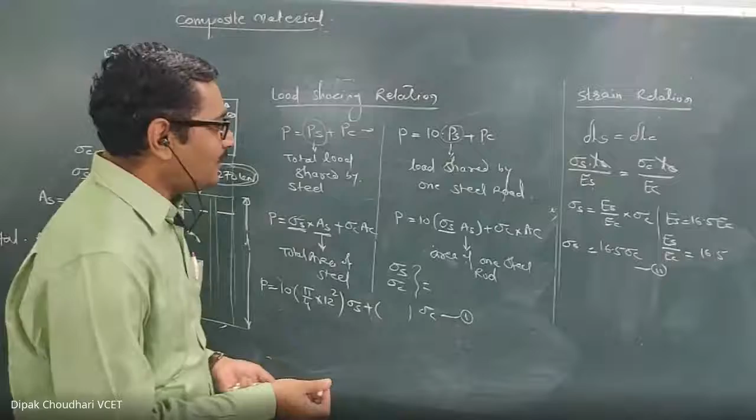Since the materials are rigidly connected, they are not free to elongate separately. And since they are not free to elongate separately, the total load applied is shared between the two different materials. So first you have to write down the load sharing relation.

Load sharing relation: P equal to P1 plus P2. P1 is the load shared by material 1, P2 is the load shared by material 2. Because of P1, the stress induced in material 1 is sigma 1. So the same equation can be written as sigma1*A1 plus sigma2*A2, where sigma1 and sigma2 are the stresses induced in materials 1 and 2 because of P1 and P2.

From this we can get one relation, either the first equation or the second equation. Then next you have to write down the strain relation, which means the relation of their deformation. For every such problem you have to write these two equations: the load sharing relation and the strain relation.

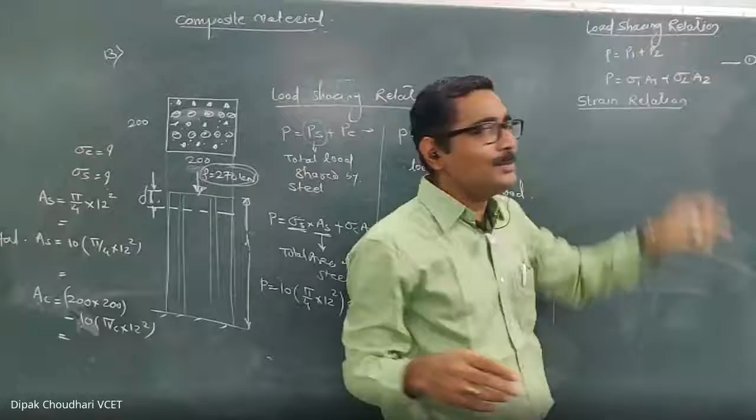But the equation will be different. The load sharing won't always be P equal to P1 plus P2. Then there's this situation where two different materials are rigidly connected.

They are connected in parallel, and when the load is applied, here's a very simple case. The total load applied is shared between them, but depending on the different situation, we have to change the load sharing relation as well as the strain relation.

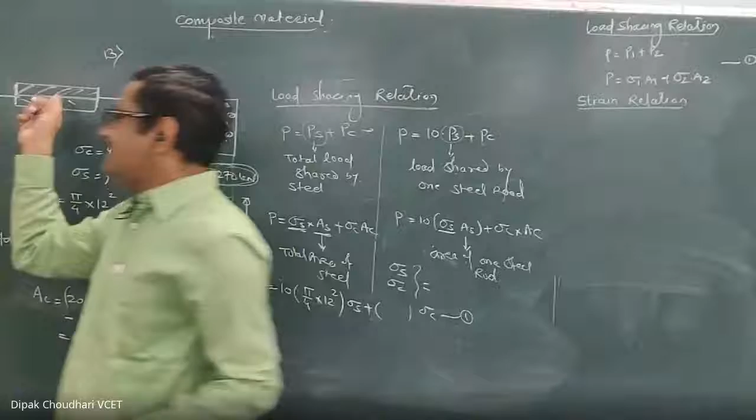In this case, since these two materials are rigidly connected, because of the external applied force, the deformation of both materials will remain the same. So we can write the strain relation as delta L1 equal to delta L2.

Delta L1 and delta L2 can be written in terms of P1 and P2, or in terms of sigma1 and sigma2. For example: P1*L1/(A1*E1) equal to P2*L2/(A2*E2). This is the equation in terms of P1 and P2. Or I can write sigma1*L1/E1 equal to sigma2*L2/E2.

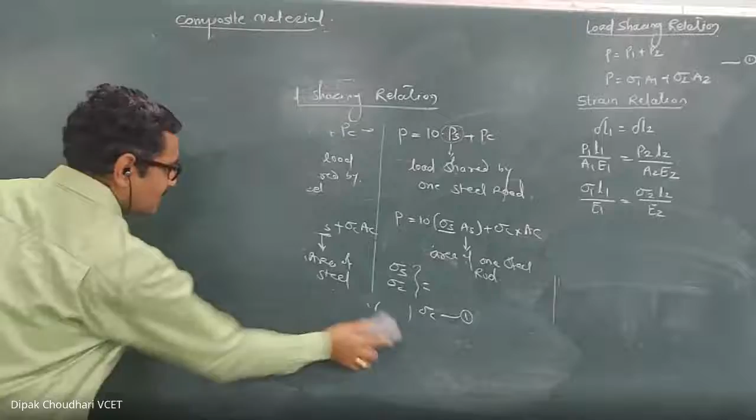In this way we have to write down the strain relation and the load sharing relation. Now, in the last two problems we solved, we calculated the stresses induced in two different materials because of some external forces. At the end of the last lecture, I told you the difference between induced stress, allowable stress, yield stress, ultimate stress, and all these things.

Now today we are going to solve the next problem, sum number 14 from your PDF. I am drawing the figure.

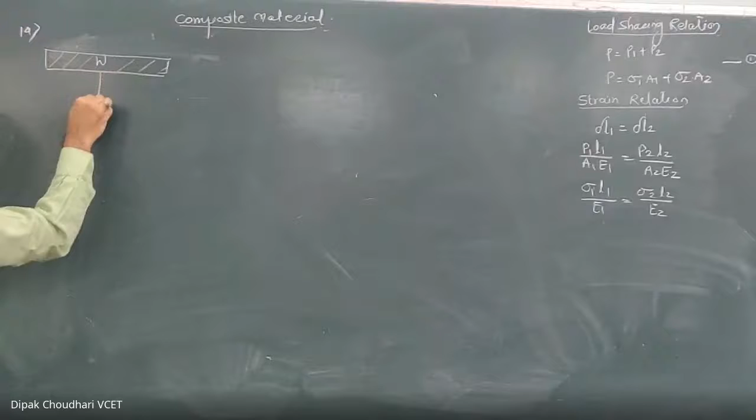This is one load W, which is supported by three rods. This is one rod, this is another rod, and this is the third rod, and it is symmetrical. Due to symmetry, the load shared by these two rods will be the same.

Now at the bottom, the support is like this. In fact, the initial length of all three rods are not the same. This is the brass rod, and this middle one is the steel rod. Two different materials are there, and they are connected.

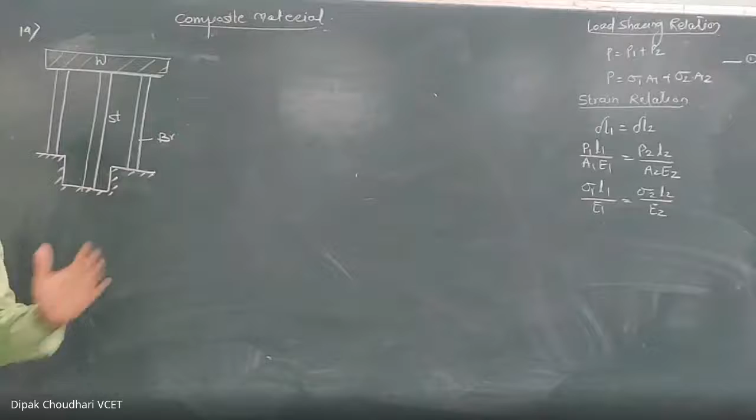Between these, there is no rigid condition, but they are symmetrically spaced. Because of this load W, this is also steel... these both are same, sorry, brass. These both are same length, same cross-sectional area, meaning the load shared by these two rods will also be the same. So because of this W, let's see what we have to calculate.

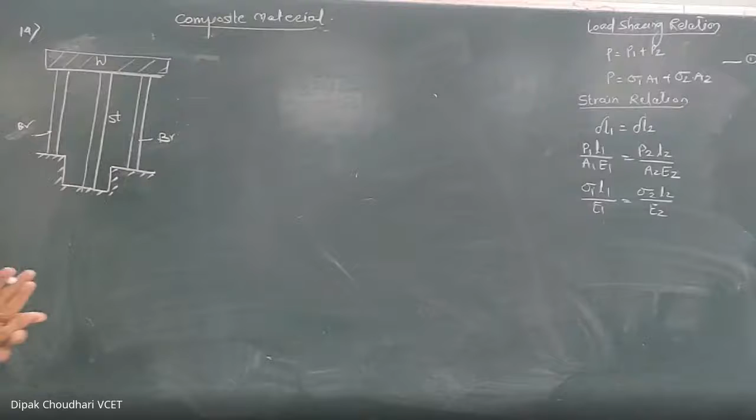But here, the brass and the steel, we have to assume them as rigidly connected. They are not free to act individually. In this case, it won't be that because of this load, only the steel will compress and the brass will not compress. So we have to assume them as rigidly connected.

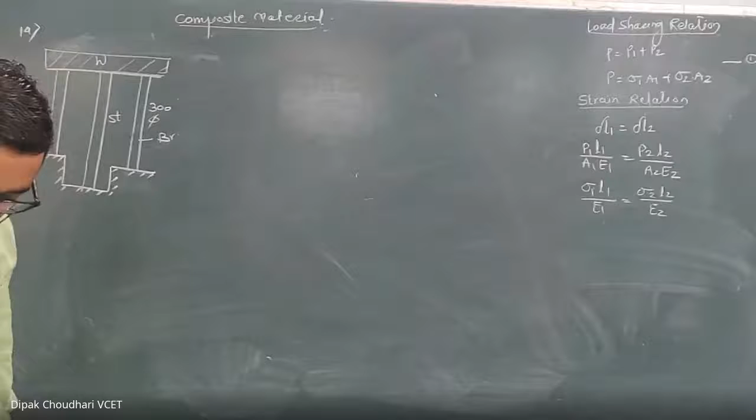Now it is given that a rigid block of weight W is supported by three symmetrically spaced rods. The brass rods are 14 millimeter diameter and 300 millimeter length, both having the same length and same cross-sectional area. And the allowable stress is 90 megapascal. This is something new in this question - these allowable stresses are given.

Allowable stresses: the allowable stress in the brass should not exceed 90 megapascal, which means 90 Newton per millimeter square.

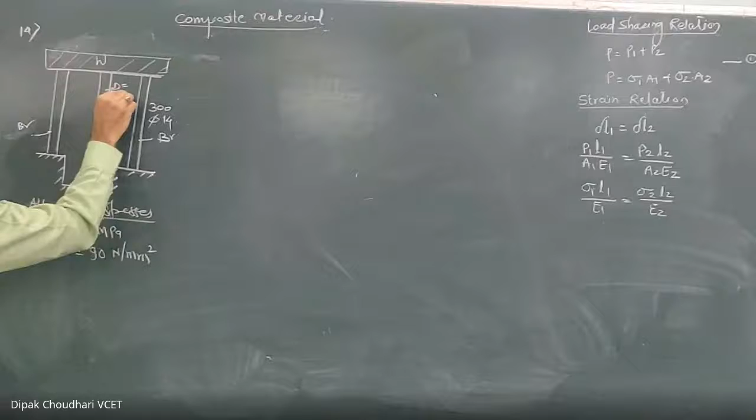The steel rod is hollow with 20 millimeter and 16 millimeter being the external and internal diameter. For the steel rod, the external diameter capital D and internal diameter small d are given: external diameter is 20, internal diameter is 16. The length of the steel is 500 millimeter.

The allowable stress in the steel is 120 Newton per millimeter square, that is 120 megapascal. Allowable stresses are given.

Determine the safe maximum value of W which can be supported. You have to calculate corresponding to the safe allowable stresses - how much maximum safe load which we can apply on this system. Here, you have to calculate W safe, the safe load which we can apply, corresponding to this condition and these allowable stresses.

Take ES equal to 200 GPa and EB equal to 80 GPa. Modulus of elasticity of the steel is 200 gigapascal, and modulus of elasticity of the brass is 80 gigapascal.

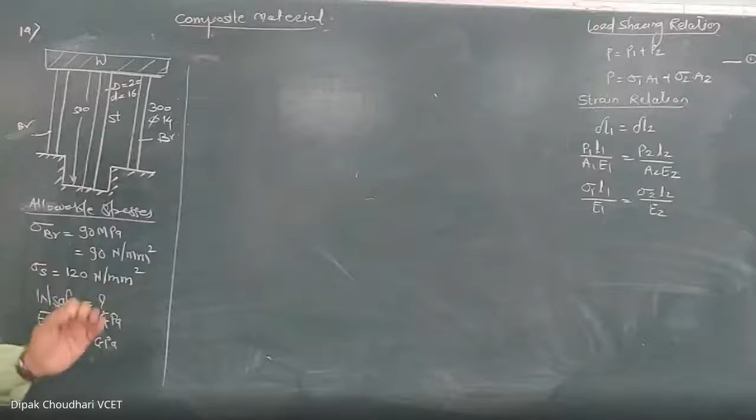Now, first thing, the difference between the previous question and this question is that in the previous question, the load applied on this composite material was given. Corresponding to this load applied, we have calculated the stresses in material 1 and stress in material 2.

Just one minute. We have to calculate the stress induced in material - sorry, we have calculated the induced stresses in material 1 and 2.

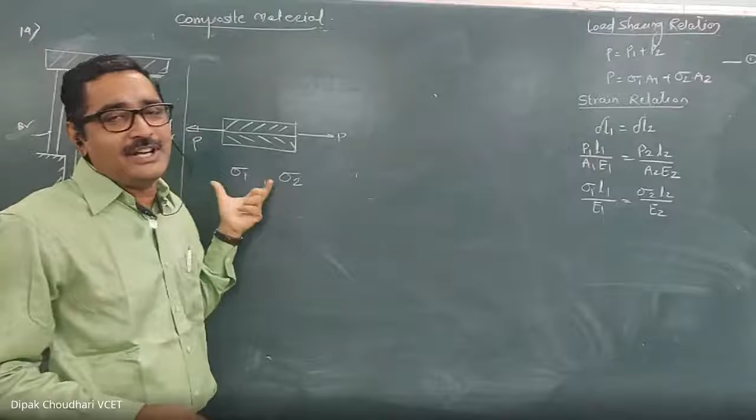Now, in this question, corresponding to these allowable stresses, we have to calculate the safe load W. These are the allowable stresses in steel and brass - the permissible stresses. During its service period, at any time, the stresses induced in the material should not go beyond this.

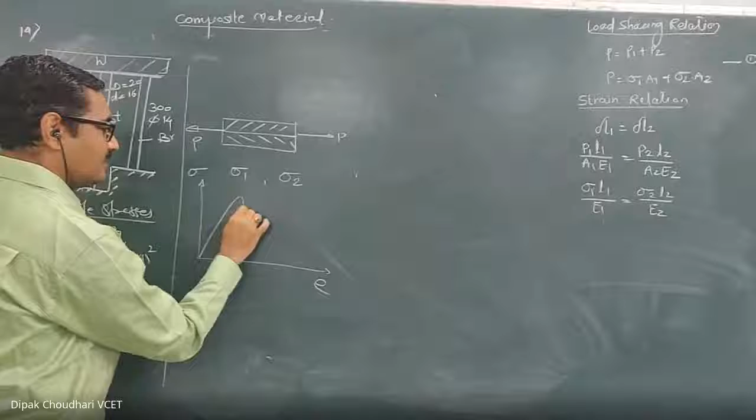These stresses we calculated earlier were different - those were the induced stresses, whereas these are the allowable stresses. In the stress-strain diagram, normally these allowable stresses are within the elastic limit.

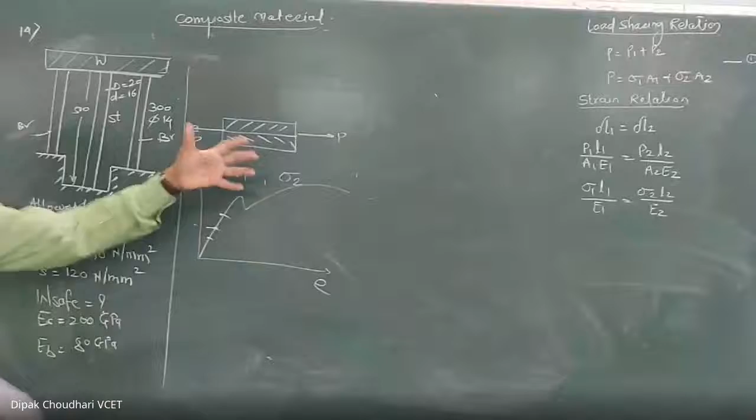Induced stresses are always less than allowable stresses. If the induced stresses go beyond allowable stresses, we can say these are not safe. Induced stresses may vary depending on the external applied load - if the external applied load is less, the induced stresses will be less. But these are the allowable stresses.

This is the limitation: the stresses induced in this material at any time should not go beyond that particular value. These are known as the allowable stress. Now corresponding to this allowable stress, we have to calculate the safe value of the load W.

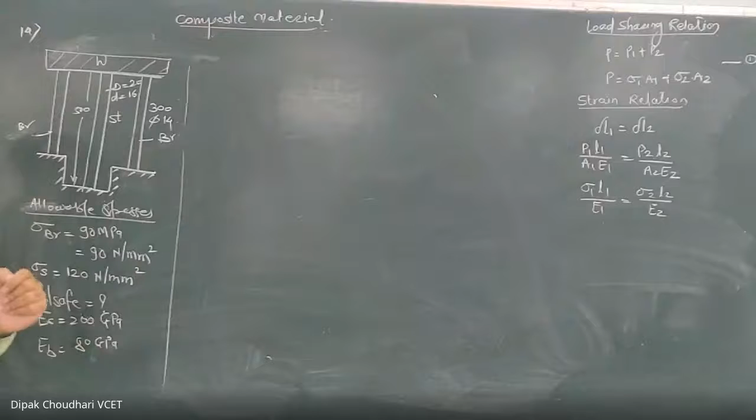Remember, whenever such a composite material system exists and the allowable stresses in both materials are given, it is not necessary that both materials will reach their permissible value of stresses simultaneously. I am explaining this concept once again later, but now we'll proceed with this.

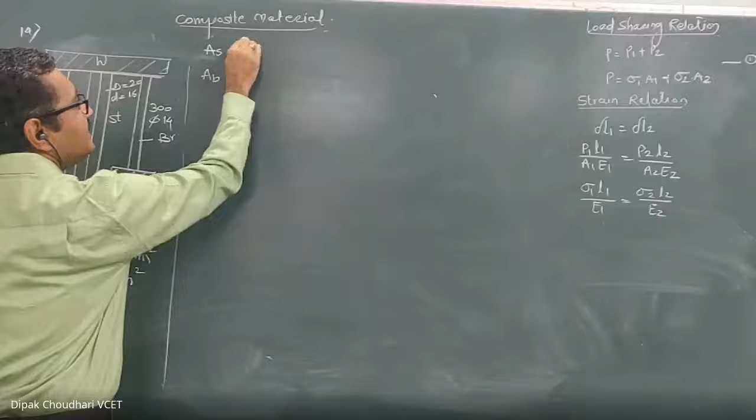First I will calculate the cross-sectional area of steel and cross-sectional area of brass. Cross-sectional area of steel is pi by 4 into capital D square minus small d square. Calculate and tell me the answer.

Cross-sectional area of the brass - I am considering only one brass rod. If you consider the total cross-sectional area of the brass, then you have to consider 2 times. It is pi by 4 into 14 square. Let's make it 2 times, I'll explain you the next time.

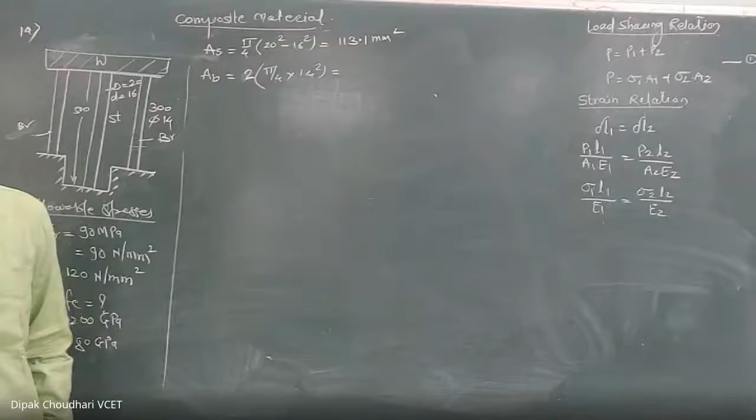Tell me, how much is the area? Is it 113.1 millimeter square? Okay, no problem. And the second one, if you consider 2, it is 307.89.

Okay, this is the cross-sectional area of the brass, this is the cross-sectional area of both the brass rods. So they have calculated the cross-sectional area.

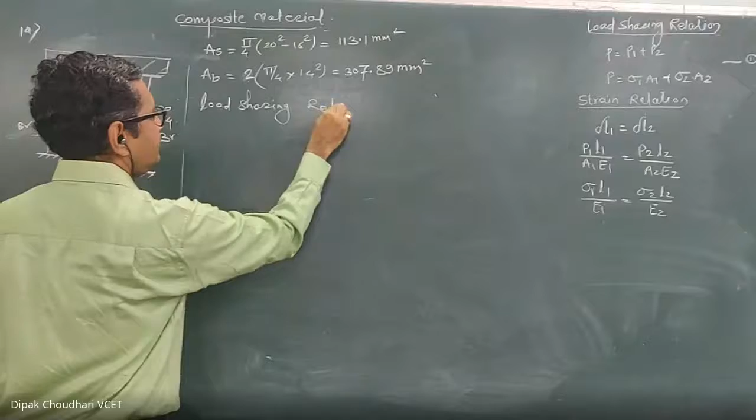Now let's write down the load sharing relation. This load W which we are applying on these 2 rods is shared by the 2 materials. Considering this brass rod, though there are 2 brass rods, we can write the relation: total load applied equals load shared by the brass plus load shared by the steel.

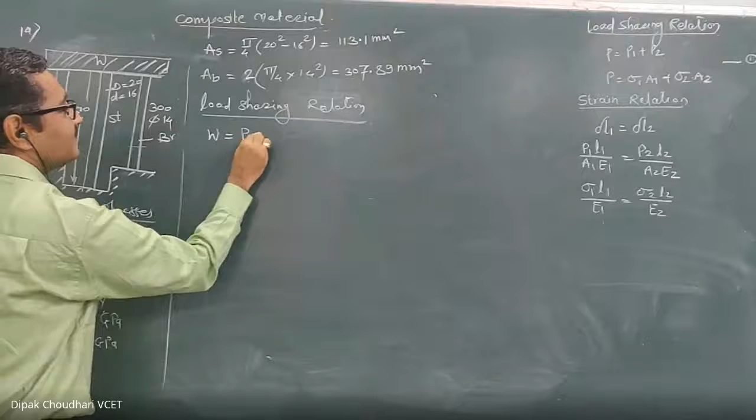If you write the load shared by the brass in terms of stress, PB equal to sigma B into AB, then this will be the area of the total brass rod, both the brass rods. If you write it as 2 PB instead, then it's the load shared by only one brass rod, and you'd consider the area of only one brass rod. The ultimate equation will be the same. Since I have considered the area of both brass rods, I will write the equation W equal to PB plus PS.

So W equal to sigma B into AB plus sigma S into AS. Now I know AB and AS, let's substitute that. So W equal to AB, which is 307.89, into sigma B, plus AS, which is 113.1, into sigma S. Call this equation number 1.

Look at the board now, this is a very important step. I substituted the value of the area and wrote this equation. Now in this equation there are 3 elements: W, sigma B, and sigma S. In the last question we solved, W was given and we calculated the stresses. Remember, in this equation these are the induced stresses, induced because of this ultimate load W.

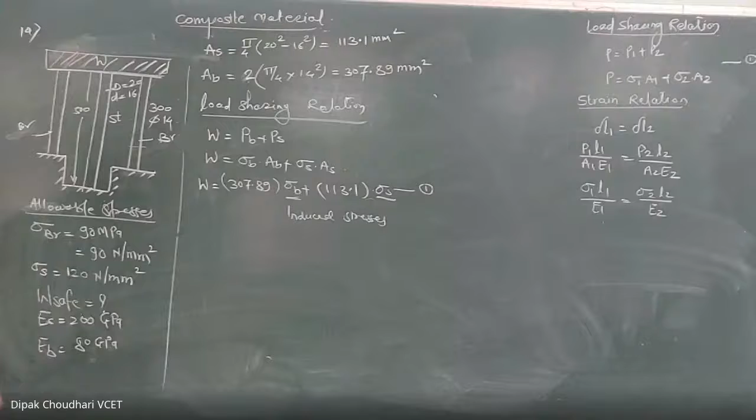Now here students make the mistake of directly substituting the given values of stresses in brass and steel into this equation to calculate the load W. But when you calculate this load W, it may not be safe, because those given values are allowable stresses, whereas these in the equation are the induced stresses. Understood? So don't substitute the allowable stresses in this equation.

Understood, clear? Now what to do? Let's keep this equation as it is, and write down the strain relation.

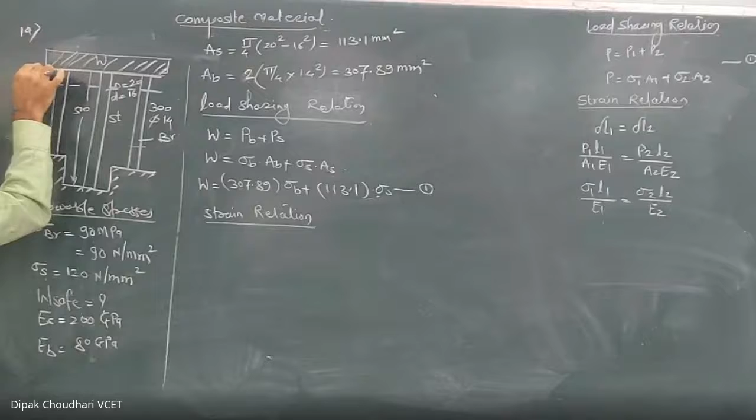Strain relation. Now, because of symmetry, when this load W is applied, whatever compression occurs because of this compressive load will remain the same due to symmetry. This compression will be the same for the brass as well as the steel. It won't be an inclined compression, because of the symmetry.

It goes linearly downward, and because of that, the deformation or compression of the brass and the compression of the steel will remain the same. So the strain relation can be written as delta LB equal to delta LS — deformation of the brass equal to deformation of the steel.

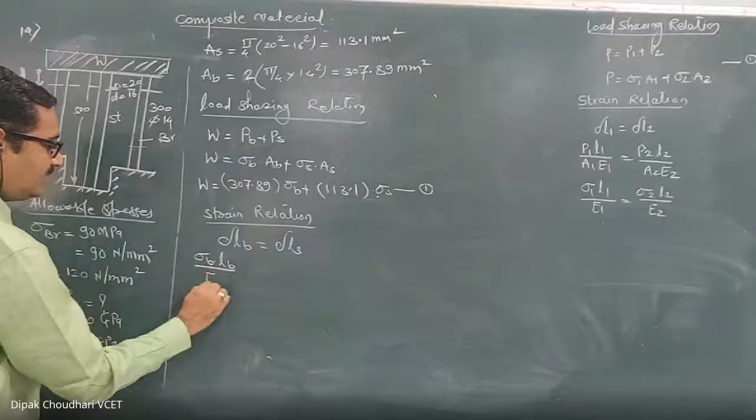This equation in terms of stress can be written as sigma B into LB upon EB equal to sigma S, the stress induced in the steel, into LS upon ES. Again, sigma B and sigma S are the induced stresses because of any load applied. If you know the load applied, you can easily calculate the induced stresses by solving these two equations. But here we have to calculate the safe load W corresponding to the allowable stress.

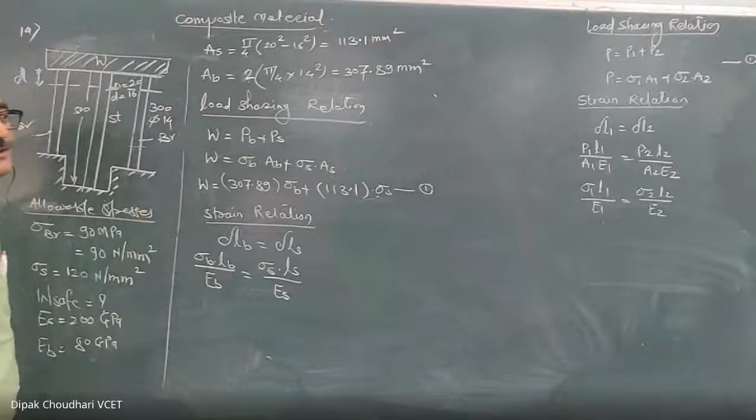Coming back to this — last time what we solved, the lengths were equal, but here the lengths are not equal, so they won't get cancelled. So let's substitute the value of LB and LS.

So I can write sigma B into LB, the length of the brass rod, which is 300, equal to EB upon ES into LS, the length of the steel rod, which is 500, into sigma S.

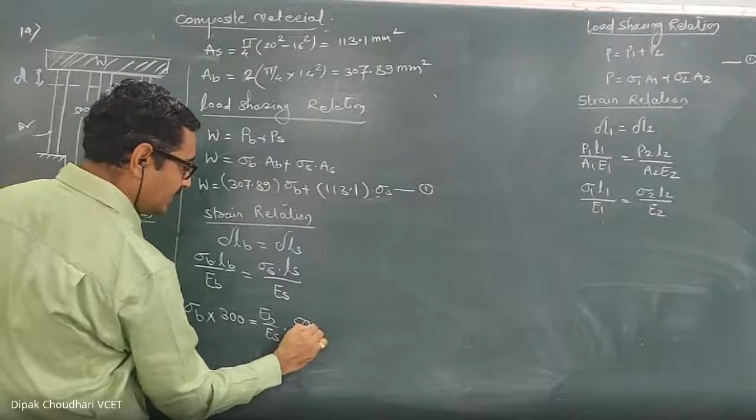Now this is the modular ratio, or 1 upon modular ratio — EB upon ES, where EB is given and ES is also given. This 300 and 500 are in millimeters, so you can convert into Newton per millimeter square. If the stress values are in Newton per millimeter square, the load will also be in Newton. But since it's a ratio, it doesn't make any difference whether you substitute in GPa or convert into Newton per millimeter square.

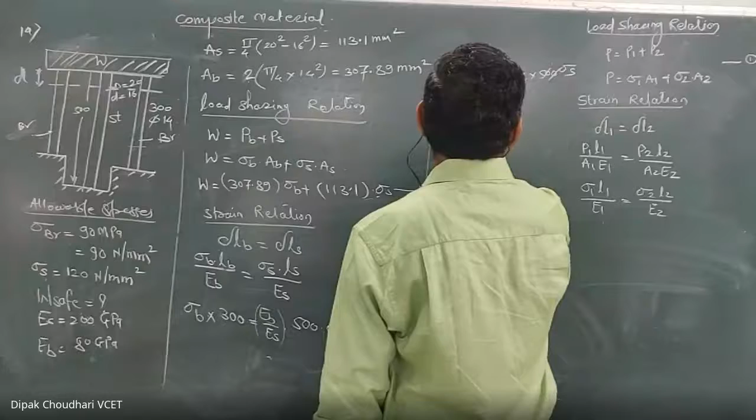So it is sigma B into 300 equal to EB, which is 80, upon 200, into 500, into sigma S. This gets cancelled, so sigma B equals 80 into 5 upon 600 sigma S. So you get one relation between the induced stresses — sigma B equal to how much?

400 upon 600, or 600 upon 400, which is 1.5. So I can write sigma S equal to 1.5 times sigma B. Call this equation number 2. Sigma S equal to 600 upon 400 into sigma B, and 600 upon 400 is 1.5.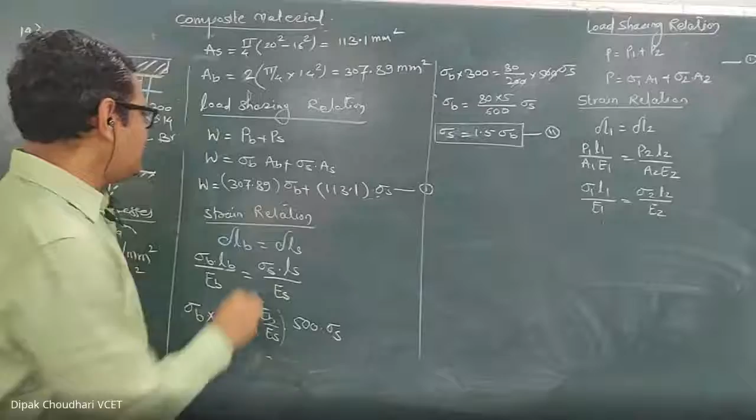So I will get another relation between the induced stresses. This is one relation and this is another relation. Listen once again, these are the induced stresses, not the allowable stresses.

Now, if you observe this second equation, it gives you the relation between the stresses induced in the steel and the brass for this configuration. For any load, this relation between the induced stresses remains as it is and does not change.

So if you substitute the allowable stresses in this equation, it may not be satisfied. The reason is that for any particular load, both the allowable stresses won't reach or be induced simultaneously. It may happen that the stress induced in the steel reaches its maximum allowable value of 120, while at the same time the stress induced in the brass may be greater than 90 or less than 90. It happens.

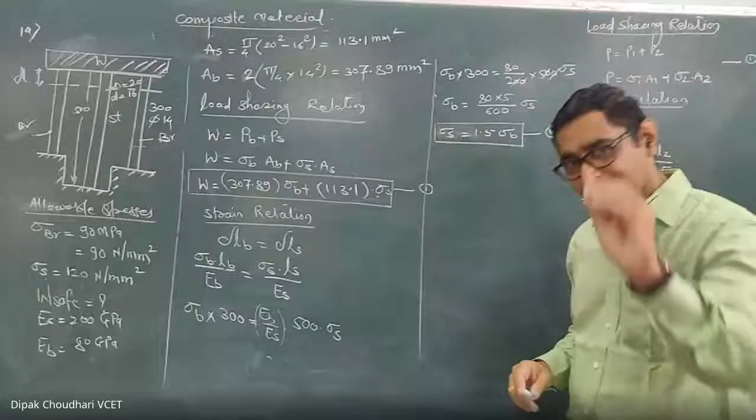So this is the relation between the induced stresses. Now what you have to do? This is a very important sum. On this concept, you have to solve a number of sums on bending stresses and shear stresses and all these things. This is a very important concept.

So these are the induced stresses equations, from which you have to calculate the safe maximum load W, such that the induced stresses should not go beyond the allowable value.

Now, what I am going to do? Apply such a load W on this system such that the stress induced in brass reaches its maximum allowable value of 90 megapascal, that is 90 Newton per millimeter square.

Listen carefully. What I am assuming is that I have applied such a load W, though how much that load is, I don't know. But I applied such a load that because of it, the stress induced in the brass reaches its maximum allowable value of 90. It should not go beyond this.

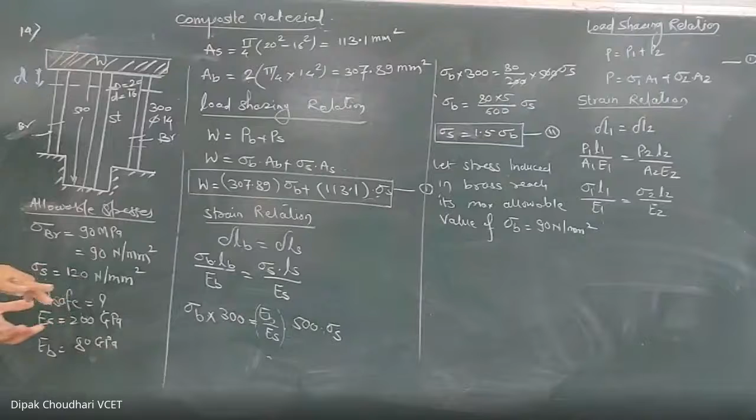If it goes beyond this, then that load is not a safe load. So I am applying such a load that the induced stress in the brass reaches its maximum allowable value of 90 Newton per millimeter square.

Now, because of this load, the stress induced in the brass reaches its maximum value of 90 Newton per millimeter square. Corresponding to that load W, what will be the stress induced in the steel? That we can calculate using this relation, because this is the induced stress due to that load W.

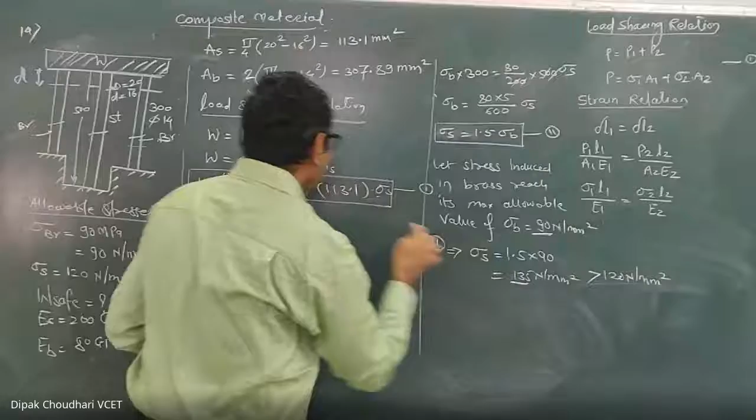Corresponding to this 90 and 135, if I calculate load W by substituting these values, I will get one load, but that won't be the safe load. That load will be safe for the brass, but that may not be safe for the steel.

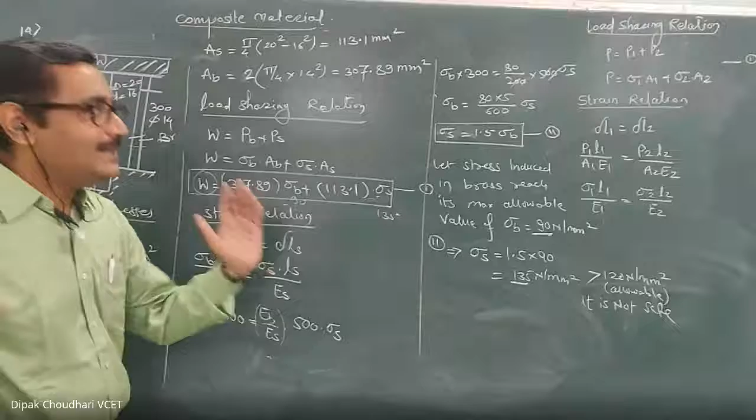So let's consider we apply the load W such that the stress induced in the steel reaches its maximum value. Yes, if this isn't safe, then the second case will be safe.

Okay, so I'm considering, let the stress induced in... now I'm rectifying this only. If you haven't written it, just take a screenshot and write it later, because I'm rectifying this. Okay, so this was the first case. Now I'm considering the second case. First case was not safe.

If it comes safe here, no need to consider the second case. So let's consider the second case. Now in the second case, I'm applying the load W, because of which the stress induced in the steel reaches its maximum allowable value of 120 Newton per millimeter square. So let the stress induced in the steel reach its maximum allowable value, how much is the allowable value in steel? It is 120 Newton per millimeter square.

We're applying so much load that the stress induced in steel reaches maximum permissible value of 120. And when stress in steel reaches 120, corresponding to that load W, how do we calculate the stress in brass? By using this formula. So use equation number 2. So if I use equation number 2 here, sigma B equals sigma S upon 1.5.

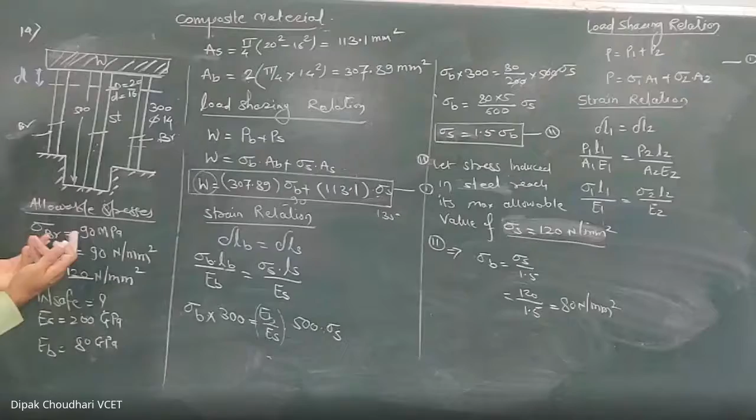So when the stress induced in the steel is 120 for this configuration, corresponding to the load W, the stress induced in the brass is 80. And this 80 is within the given permissible limit. How much is the permission? Up to 90. Yeah, but induced stress is only 80, which is less than the allowable value of 90 Newton per millimeter square. So hence it is safe.

So we have to calculate the safe load W by considering sigma S as 120 and corresponding stress in brass as 80, not 90. So the safe value of load W, substitute this sigma S and sigma B, 80 not 90, 120 and 80, in equation number 1, and you will get this W. Since the stresses are in Newton per millimeter square, W will also be in Newton.

Here calculate this safe value. This is the safe value of W. Because of this safe value, the stresses induced in both materials are within permissible limit. Because of this W, both materials will be safe - in neither will the induced stresses go beyond the permissible value. Tell me how much is the answer? Calculate, substitute this sigma S and sigma B in this equation number 1 and tell me the value of W.

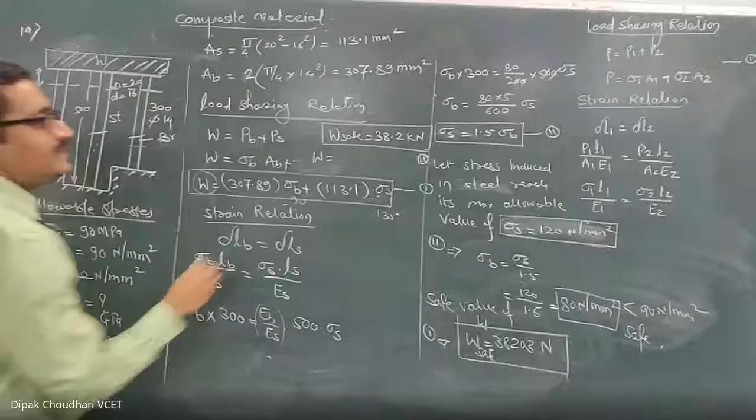Now, if I apply the load on this configuration, in this situation, if I apply a load of 39 kilonewton, what will happen? Answer my question. Definitely it will not be safe because the maximum safe value is 38.2. But what will happen because of 39? Interpret this. Tell me. The system may fail, definitely if it is not safe. But how will it fail?

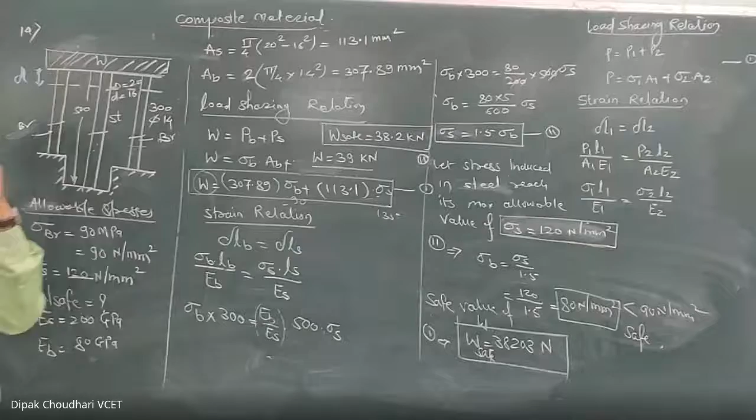Not suddenly, but it can give a warning before failure if it is a ductile material, and steel is a ductile material. Sir, it might become a bit brittle. No, listen carefully, we are not going to do any analysis related to failure and all these things. How will it fail, it won't become brittle, but even if it did, we have the allowable stresses.

Listen carefully to what I want to tell you. Now this 38.2 is the safe maximum load W. If I apply this much load, answer my question: if I apply 38.2 kilonewton load, how much is the stress induced in the steel?

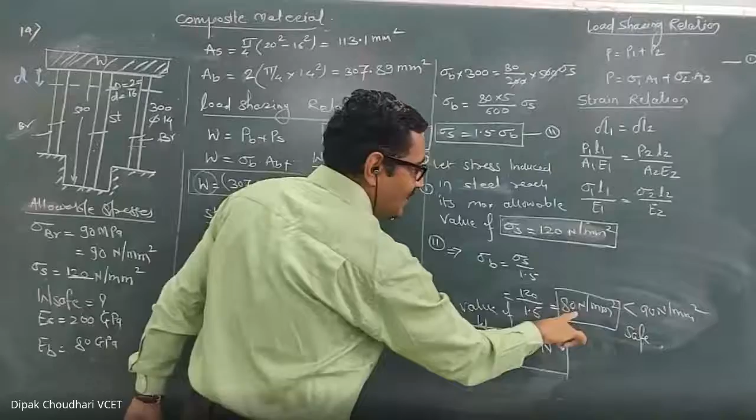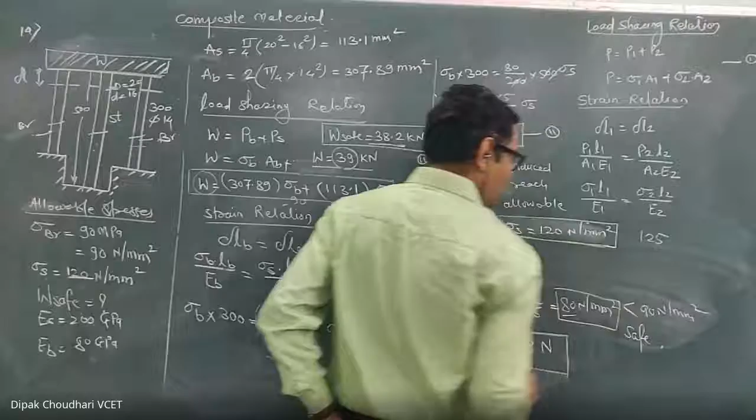Okay, both will be safe, both materials will be safe because the stress will not cross the allowable value. But if I increase this load from 38.2 to 39, then because this load is increasing, the stresses in both materials will also increase. Clear? So this will become more than 120, it may become 125, and this will become 80 to 85, not the exact figure. These are not exact figures, but since I am increasing the load, the stress induced in both materials will also increase.

So because of this load, we have calculated this safe load corresponding to the maximum allowable stress in the steel. If I apply a load slightly more than that, because of that load, the stress induced in the steel goes beyond its permissible value. Here, because of this load, the stress induced in the brass may not go beyond the permissible value. That 80 may become 85, it won't reach 90.

This means if I increase from 38.2 kilonewton to 39, this load may be safe for the brass but may not be safe for the steel. This means because of this 39 kilonewton, first the steel will fail and then the brass will fail. In fact, the brass will not fail, but because of the failure in the steel, the brass may get affected. So 38.2 is the safe value; if I apply slightly more than that, the steel will fail first.

Understood? My question was about how failure occurs - because of this 39 kilonewton load, first steel will fail, then brass will fail. The reason is that because of this 39 kilonewton, the induced stresses in the steel go beyond the permissible value of 120.

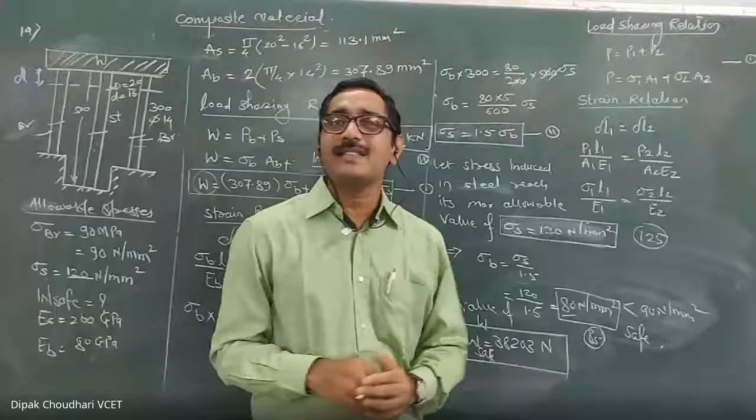Because we have calculated the safe value of the load W, considering that the maximum stress induced in the steel reaches its maximum value of 120, the induced stress is equal to the permissible stress. Is that clear?

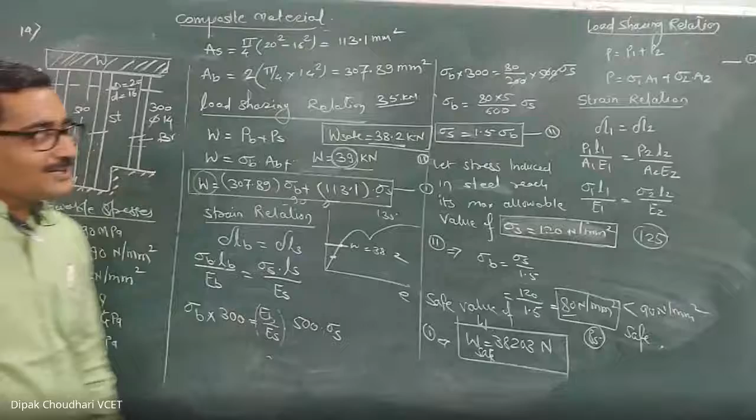I hope from this sum it is clear about the induced stresses and the permissible stresses. This is a very important concept. Okay, now next question.

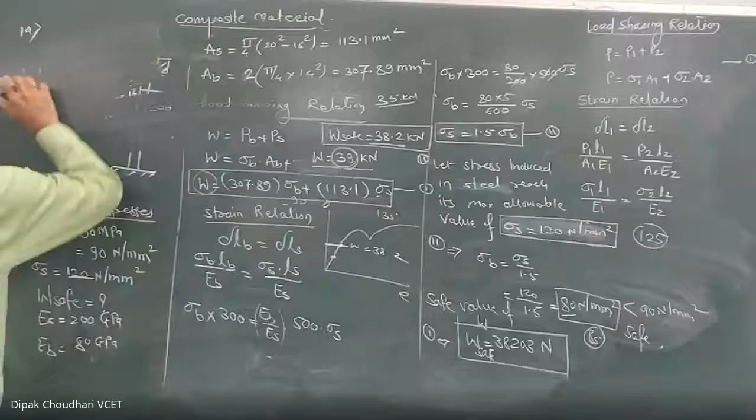Okay, now stresses in indeterminate structure. I think I have provided the PDF till this sum only. Today I will provide you the next PDF.

Next one is stresses in indeterminate structure. Sir, write a little downwards, we cannot see that. Okay fine, write down stresses in indeterminate structure.

After that I will write it down. Now listen to me. The first question is, what is meant by indeterminate structure? Remember, an indeterminate structure is a structure in which we cannot calculate the support reaction just by using the conditions of equilibrium. For example, suppose this is the beam.

Here there is a hinge, and here also there is a hinge, and some forces are applied here - an inclined force and UDL is there. So this system is in equilibrium.

Here, so total unknowns are 4, which we cannot calculate by using only 3 conditions of equilibrium. By using 3 conditions of equilibrium, we get only 3 equations, and by using 3 equations we can calculate at most 3 unknowns, not 4 unknowns. Such type of structure is known as an indeterminate structure.

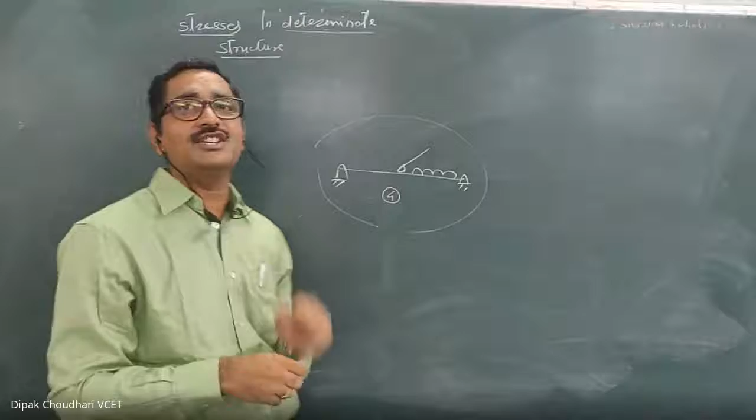In this indeterminate structure also we can calculate the support reaction, but for that we have to use some other concept along with the conditions of equilibrium. Only conditions of equilibrium are not enough. We have to use some other concept.

So here we are going to calculate the stresses induced in such type of indeterminate structure, as well as how to calculate the support reactions by using the concept of stresses. Okay.

I'll draw the figure. Sir, what is the weightage of this chapter in the exam?

This is very important, the first lesson, and from the exam point of view, the weightage for this lesson is at least 16 marks. But don't see it only from the exam point of view - this concept, this lesson is very, very important and a basic lesson for your further subjects, for drawing, for design, and all these things.

Okay. Once these concepts are clear, the remaining lessons are very easy.

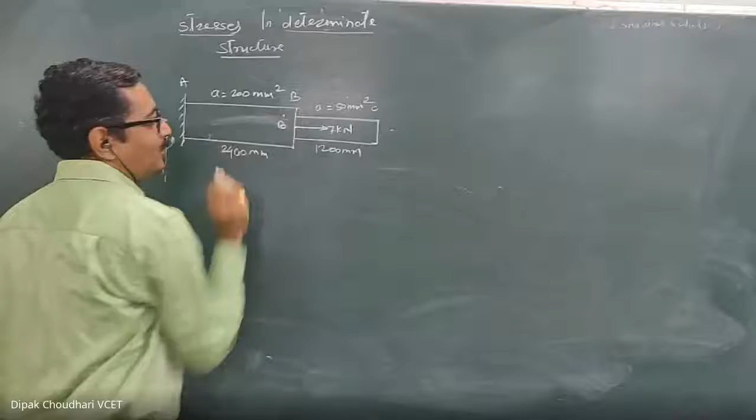Now for this rod, one force of 7 kilonewton is applied at intermediate point B. Just imagine, suppose one force of 7 kilonewton is applied at point B, and one support is here.

Now because of this, a reactive force will also generate here, and here it is fixed. Since it is a fixed support, horizontal component, vertical component, and the reactive moment will also be there. But in this system, since there is no vertical load, this vertical component of reactive force will be zero, and there won't be any external moment produced by any force.

This moment is zero, this moment is also zero. If there was a vertical force here, it would generate a moment, and to balance that moment we would need a reactive moment. But since there won't be any lateral loading, this reactive moment will not generate, and this vertical component also will not generate.

Since there is only horizontal external applied force, to balance it only a reactive horizontal force will generate here. Vertical and reactive moment won't be there because it is subjected to only axial loading, no lateral loading. Now let this reaction be RA and let this reaction be RB.

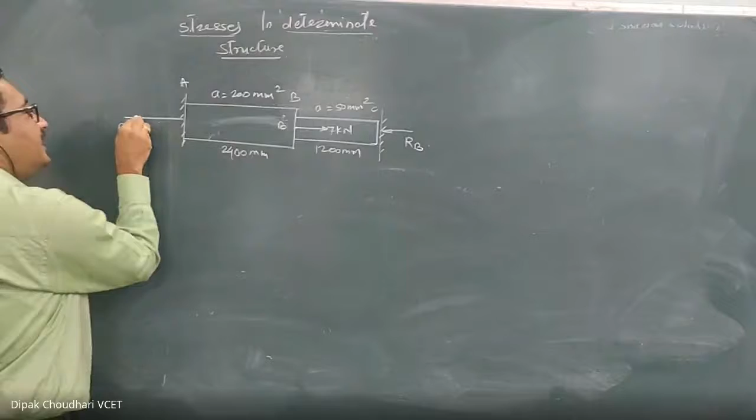To balance this 7 kilonewton load, a reaction will be induced here as well. If I assume that this RA is also towards left, to balance this 7 kilonewton acting towards right, the reactive forces will be towards left.

So here, if I use summation of Fx equal to 0, I can only write RA plus RB equal to 7 kilonewton, or 7 into 10 raised to 3 Newton. I can write only one equation by using summation of Fx equal to 0.

If I use for this system summation of Fy equal to 0 and summation of M equal to 0, I will not get any useful result. Even if I apply the three conditions of equilibrium, I will get only one equation, and in that one equation there are two unknowns, RA and RB.

So such type of system or structure is known as an indeterminate structure, in which we cannot calculate the support reaction just by using the conditions of equilibrium. We have to use some other concept - the same concept we have learned about the deformation and stresses induced in the material. Now again in this question, what is given?

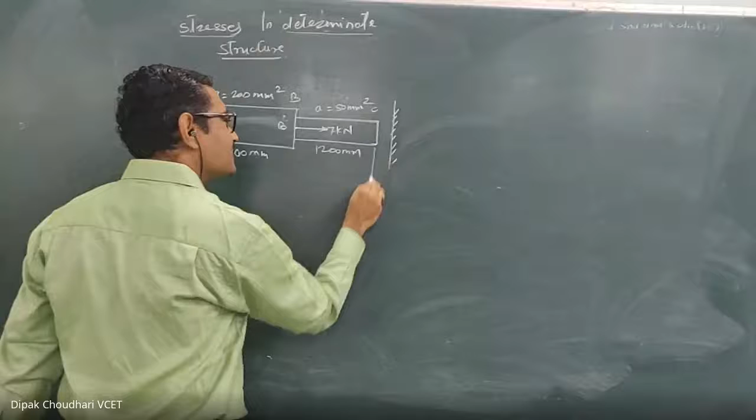Here is one rigid support, and at this free end also one rigid support is there, but between this rigid support there is some wall, and between this rigid support and the free end of this material, before applying the load of 7 kilonewton, there is a gap of 0.3 millimeter. Before applying this 7 kilonewton load, the situation is like this.

And after that we applied a load of 7 kilonewton. Here, what is the question in this sum? It is given that determine the support reactions when the member ABC is axially loaded by 7 kilonewton at point B as shown in the figure.

Also find the stresses induced in each part - how much stress is induced in each part. E is 2 into 10 raised to 5 megapascal. For this material, E equal to 2 into 10 raised to 5 megapascal, Newton per millimeter square.

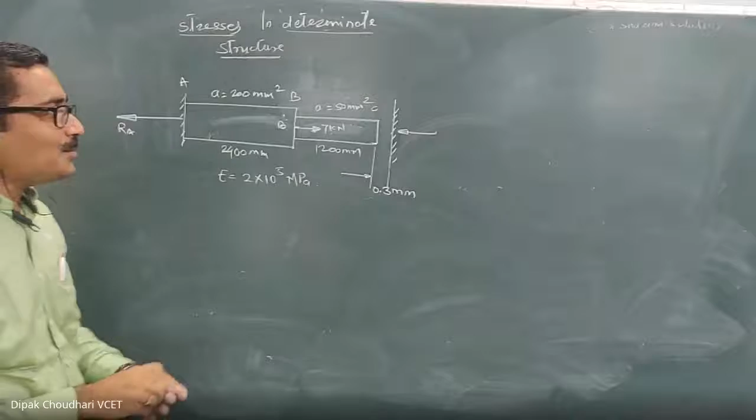Now in this case what will happen - as long as this gap of 0.3 millimeter remains, this 7 kilonewton load is balanced by this RA. But once, because of this 7 kilonewton, this AB part will get elongated, and this BC will just get shifted.

Initially, as long as this gap remains, BC will not deform. As long as this gap is there, listen carefully, if I calculate the axial force in AB - let's consider one imaginary section through AB, and in that the axial force acting on AB is 7 kilonewton when this gap is there.

And when I consider the FBD of part BC, and if I take the section of this part BC, on the right hand side there is no force because of this gap - the reaction hasn't induced at all. Hence the axial force in this part is 0.

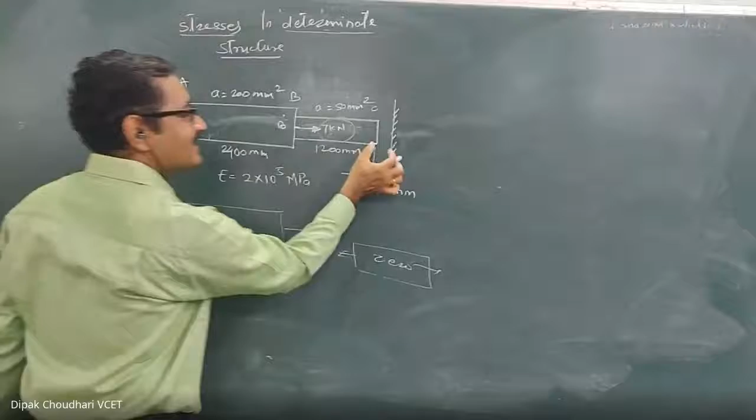Since the axial force in part BC is 0, there won't be any deformation initially of BC. Only AB's deformation will happen because of this 7 kilonewton load. When we apply the 7 kilonewton load at point B, only AB will elongate, BC will just get shifted towards right, if the deformation of AB because of this 7 kilonewton is greater than 0.3.

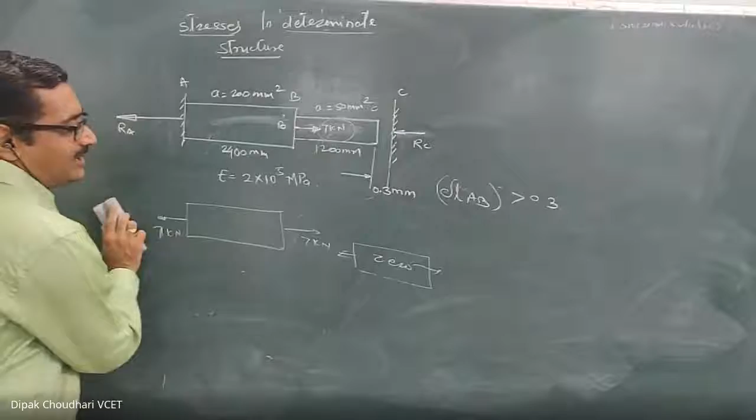Only then will this end touch here, and only after this end touches here will the reactive force generate. It means that the reactive force at point C will generate only if the deformation of AB because of this 7 kilonewton is greater than 0.3. In such type of question it will definitely be greater than 0.3, but let's check. The concept is that first this 7 kilonewton acts only on AB, not on BC.

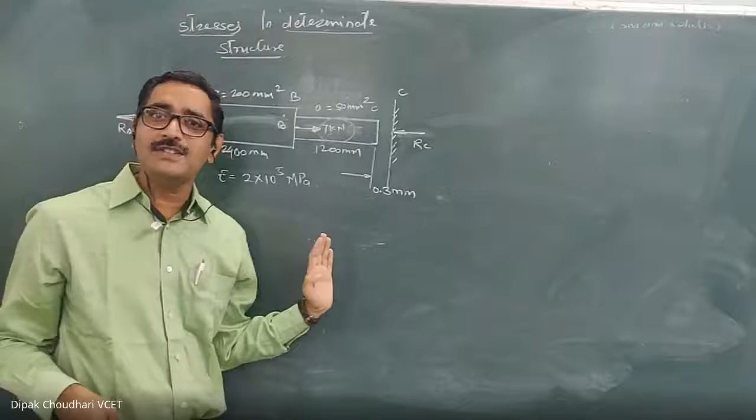This is because of this gap. And when the gap fills, when it touches here, then a reactive force is induced here, and this 7 kilonewton is balanced by RA plus RC, and in that case the reactive force is induced, or axial force is induced in part BC. Until this gap exists, no axial force will be induced on BC, and because of this 7 kilonewton there will only be deformation of AB, and BC will just get shifted towards right.

So, to check whether RC, the reaction at point C, is induced or not - when will it get induced? If delta L of AB is greater than 0.3 due to the 7 kilonewton.

So I am calculating the deformation of AB because of the 7 kilonewton. Let's calculate delta L of AB, which is equal to PL upon AE. Since there is a gap here, the axial force induced in AB, this P, is 7 kilonewton only. So it is 7 into 10 raised to 3, into length of AB 2400, upon area of AB 200, into modulus of elasticity, which is 2 into 10 raised to 5 megapascal, that is Newton per millimeter square. This much is the deformation of AB because of this 7 kilonewton.

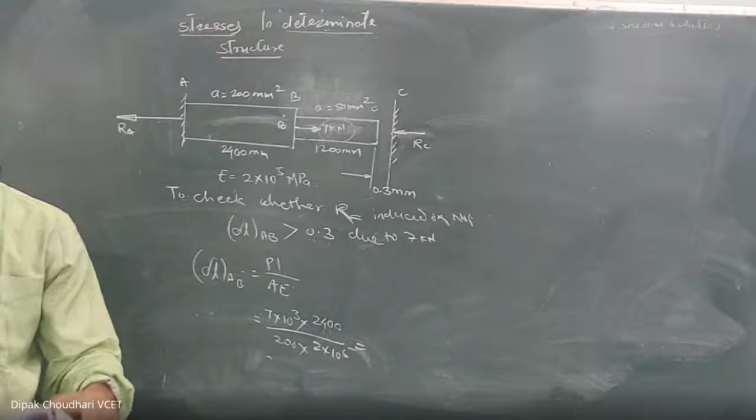Tell me, how much is that? 0.42 millimeter. And this is greater than 0.3. It will be 0.042? No, no, no, it is 0.42, cross check once again. Have you converted this kilonewton into Newton? Yes sir, because E is in megapascal, that is Newton per millimeter square. Sir, in the denominator is it 10 raised to 5? Yes, it is 10 raised to 5, not 10 raised to 6, that's why you're getting 0.042. It is 10 raised to 5. Cross check, it is 0.42. Take 2 into 10 raised to 5. Yes sir, so now it's 0.42.

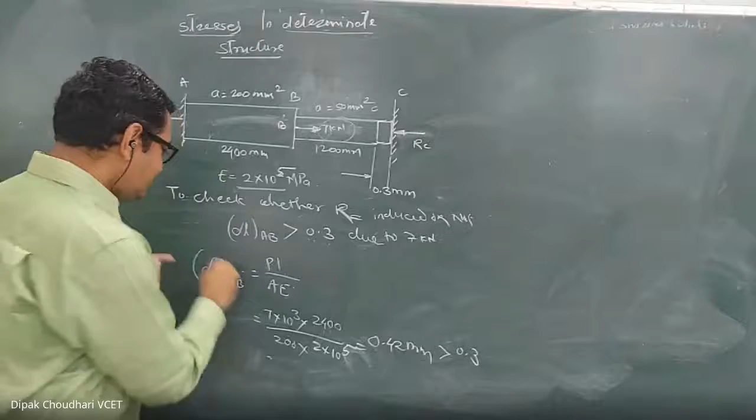Understood? Now you have to calculate RA and RC. This value we sought was just to cross check whether this reactive force generates or not. If this had come out to 0.042 millimeter, what would happen? If because of the 7 kilonewton the deformation of part AB is 0.042, which is less than 0.3, then it would never touch here, and this reaction would never develop. In that case, this RA would be equal to 7 kilonewton directly. Question is finished.

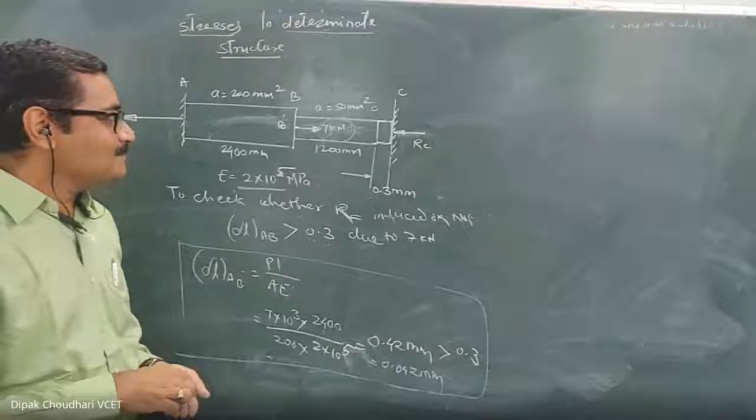Understood? So since this deformation is greater than 0.3, this free end will touch the rigid support and a reactive force will be induced there. So let's assume that this end touches the support and a reactive force is generated. Now we have to solve the question as usual.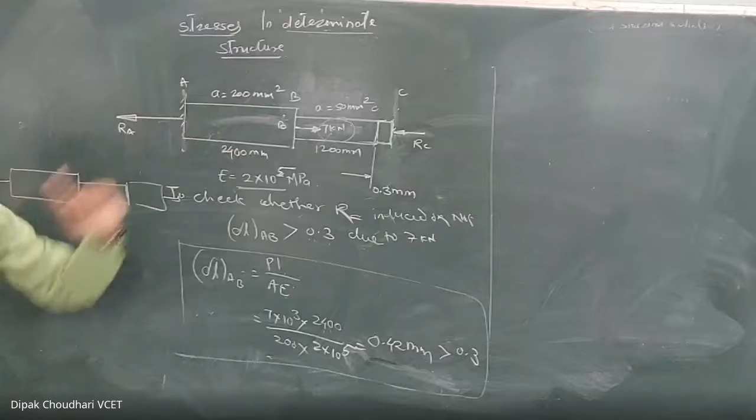It is based on this. So now I am going to write the relation between RA and RC, and I call this the load sharing relation. This 7 kilonewton load that is applied is being divided and shared between the two parts. This is the load sharing relation.

To write this load sharing relation, I am going to use summation of Fx equal to 0. You can also write it directly. Assume the direction of RA and RC towards the left. So if I use summation of Fx equal to 0, I get the relation RA plus RC equal to 7 into 10 raised to 3 Newton. This is equation number 1, taken in Newtons. So I got one relation, the load sharing relation between RA and RC.

Now I have to write down the strain relation. Notice I have kept it in terms of RA and RC, not in terms of stress. Let's write it in terms of load only. Okay, now the strain relation.

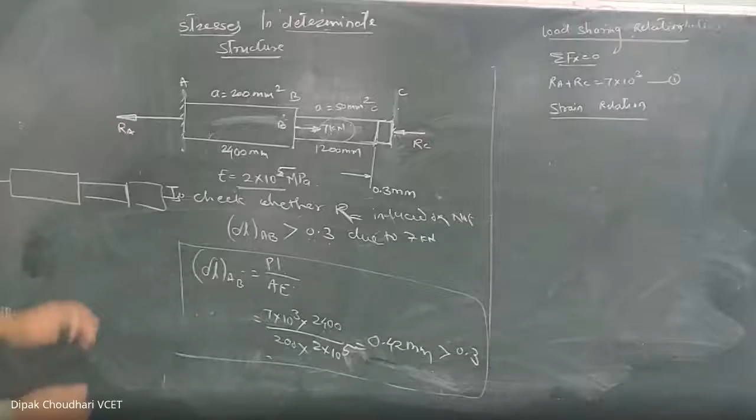I told you that the strain relation is nothing but the relation between their deformations. Now what strain relation can we write here? Initially, there is a gap of 0.3.

Now when I apply the 7 kilonewton load, it may happen that both supports are rigid supports which will not elongate or deform. So because of this 7 kilonewton, whatever axial deformation occurs in both parts, that axial deformation of both materials combined will be 0.3 only.

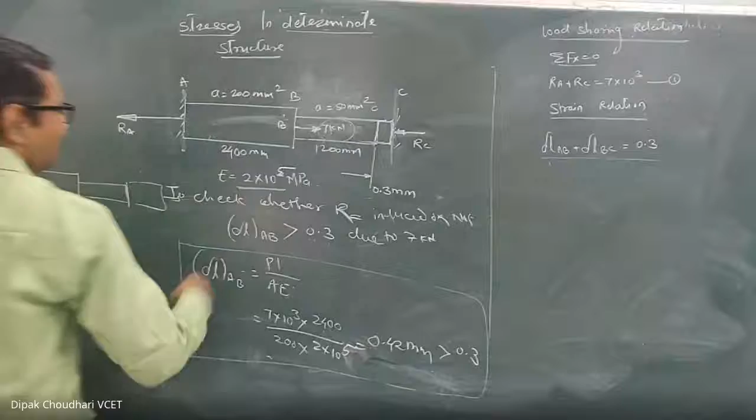Understood? So the strain relation I can write is delta L of AB plus delta L of BC equal to 0.3 millimeter. Have you understood this relation? Because of this 7 kilonewton, whatever axial elongation or deformation happens in both parts combined, it can be at most 0.3, not more than that.

Okay, clear? Now it may also be that the deformation of this part because of this 7 kilonewton, if this support were not there, would be 0.42. But because of this rigid support at 0.3 millimeter distance, it won't elongate up to that 0.42.

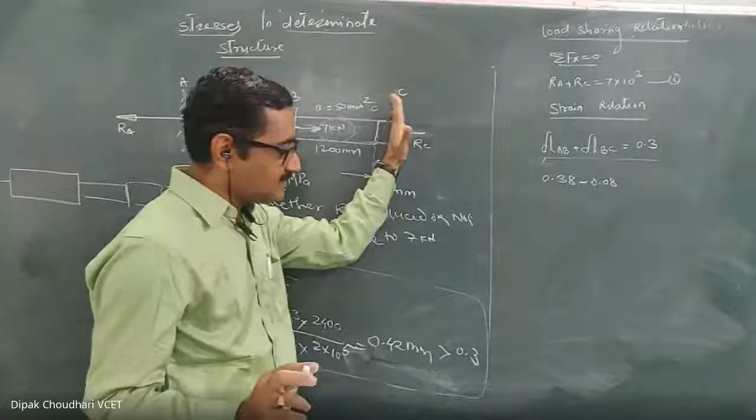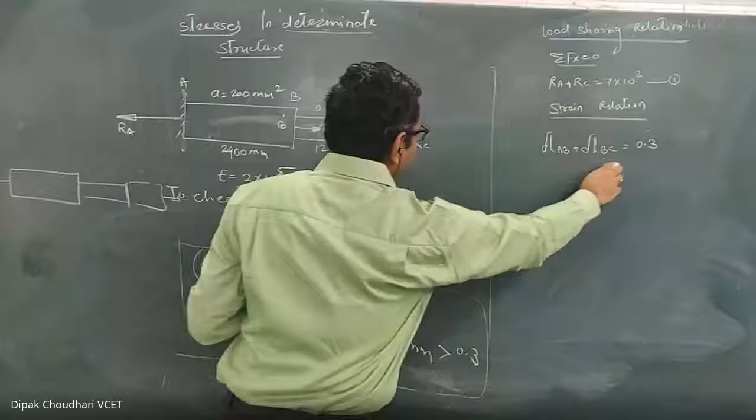Understood? Now I have to write down this delta L AB and delta L BC. This is the deformation of part AB because of the axial force induced in part AB, and delta L BC is the deformation of part BC because of the axial force induced in part BC. So we have to find out how much is the axial force in AB and how much in BC. Our situation is like this now.

Here there is a 7 kilonewton load, here there is RA, and here there is RC. These are the assumed directions of RA and RC. This is the situation. Now I have to find out the axial force in part AB.

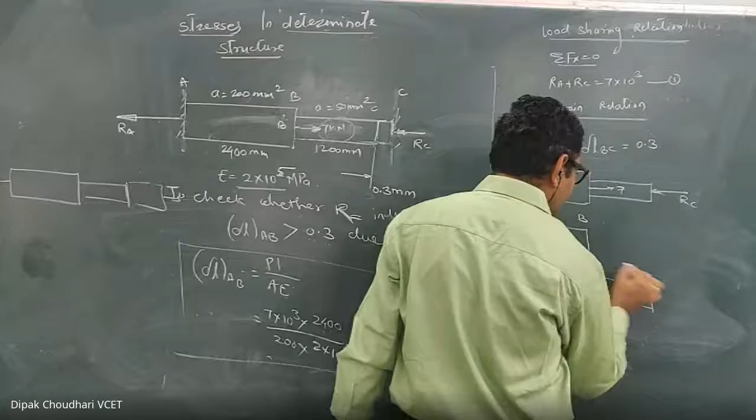To find out the axial force in part AB, let's consider the FBD of AB, and this is the FBD of BC. To find the axial force in AB, using the same concept as before, let's consider one imaginary section through AB and take the algebraic summation of forces on one side of AB. On the left hand side there is only RA, which is tensile. So AB is subjected to an axial force of RA.

Here it is RA, so here also it will be RA. And how much is the axial force in BC?

Take the imaginary section of BC and take the algebraic summation of the forces on any one side. On the right hand side there is only one force RC, which is compressive. So this is RC compressive, and to balance this, here also there will be a compressive RC. Here, this axial force in AB is RA, which is tensile in nature, and axial force in BC is RC, which is compressive in nature.

Because of this tensile axial force, this will elongate, and because of this compressive axial force, it will get contracted. Means here there is an increase in length, in BC there is a decrease in length because it gets compressed.

So this delta LAB is the deformation of the part AB because of this RA, and this delta LBC is the deformation of the BC because of this RC. And both the deformations' summation is 0.3.

So I am going to substitute it here. This delta LAB, which is subjected to tensile force, so this will be the increase in length. Since it is increasing length, I will write this equation RA into length of AB upon PL upon AE. This area of the AB is 200, and E is 2 into 10 raised to 5.

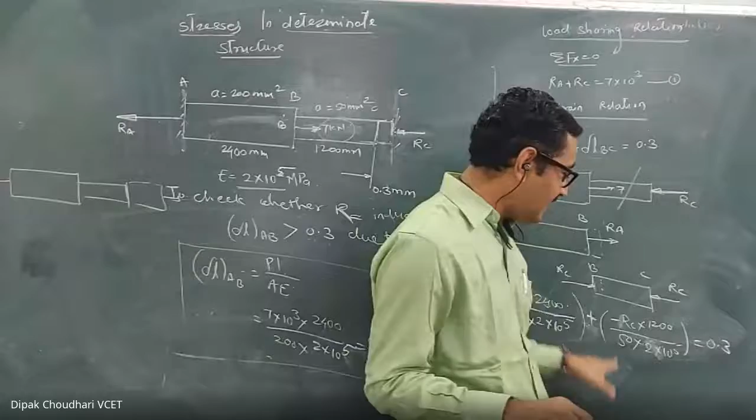How much is both's summation? Increase in length is 0.3. Here, since it is the increase in length, I have considered it as positive. This is the decrease in length, I have considered it as negative. Or you can say that since it is tensile, so positive, compressive, so negative. That's another way you can think.

Now solve this equation, call this equation number 2. Solve 1 and 2, you will get RA and RC reactive forces. If these answers are positive, assumed directions are correct. If any one is negative, that negative sign indicates that the assumed direction is wrong. So solve this, you will get RA and RC.

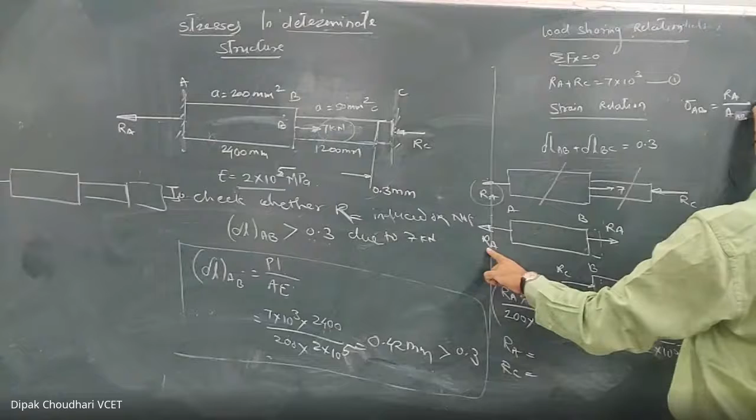And once you get RA and RC, then stress in the part AB is equal to the axial force in AB, which is RA. So sigma AB equal to RA upon cross-sectional area of AB. And stress in the part BC equal to the axial force in BC, which is RC. Both values you will get here, upon area of BC.

Now on this part AB, the axial force is tensile in nature, that's why this stress is tensile in nature, and this stress in BC, it is subjected to compressive axial force, so the stresses are compressive. Don't write here negative, instead write down the magnitude and write here the nature, that is compressive. Here we have taken this as negative because we have to take the algebraic summation of these two, and that's why we use here negative sign.

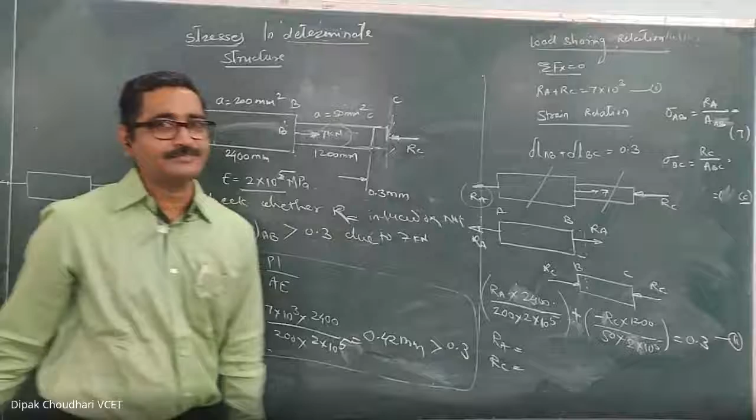Sir, RA is 6333.33. Right, and RC is 666.66. Correct answer, both answers are correct, and both are positive, means both assumed directions are correct. Since both assumed directions are correct, AB is in tension, BC is in compression, and because of that, RA and RC, now calculate the stresses in AB and BC.